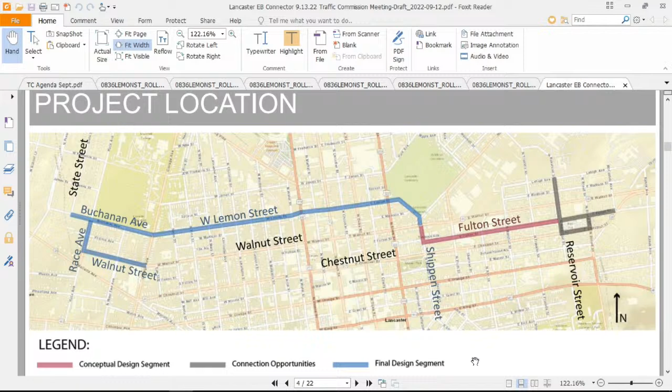So basically, the visions and goals for the project are to create an eastbound bicycle connection through the city to mirror the existing westbound facility that is on Walnut Street, creating a complete east to west circuit through the city. As part of the goals, it's to create the low-speed environment that jives well with the city's Vision Zero initiative.

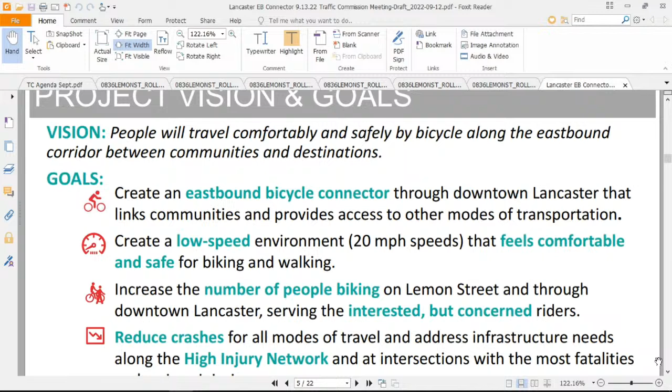to create safe operating speeds for all users within the city and to decrease high injury and deaths. Also, as part of the goal coming out of Lancaster County's active transportation plan is to increase the number of people walking and biking within the community and the county as a whole, and as I mentioned, reduce crashes.

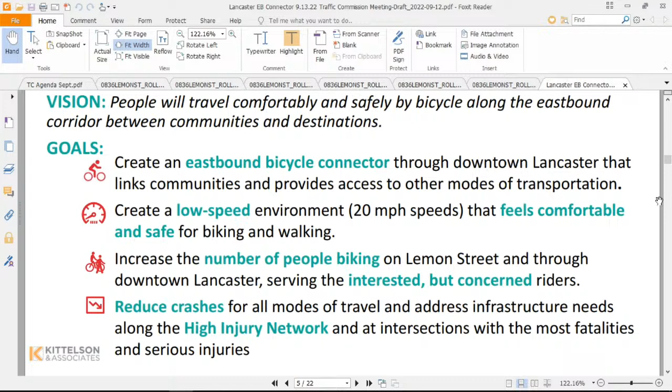We could go to the next slide, please. Touch base on it as well, but really the project stems from sections within the active transportation plan that was put together by the county and adopted by the county and the city, as well as meeting the objectives of Lancaster's Vision Zero goal. Also, with the eastbound connector also comes opportunities for future connections to the Lancaster suburbs and rural communities beyond through the planned Greater Lancaster Heritage Pathway that will connect to either end of it.

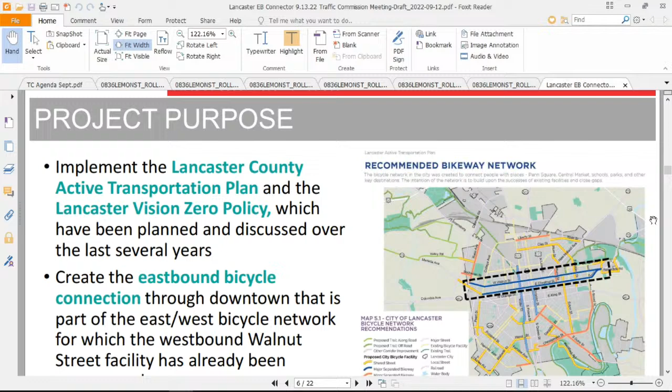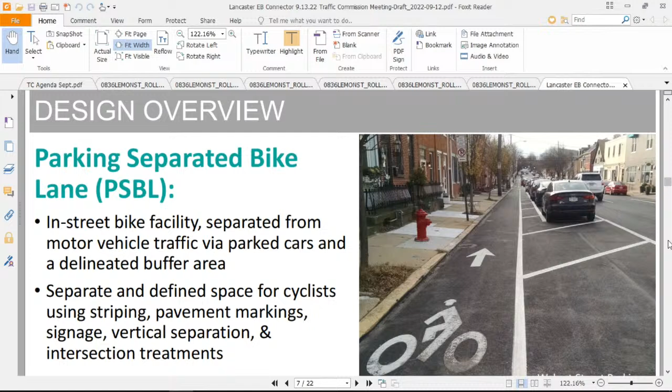Based off of data that the city collected based off of motor vehicle volumes and speeds that are on the existing corridor, the recommendation was to move ahead with a parking separated bike lane. This is a facility similar to what's on Walnut Street today. The main difference with this is, as we all know, Walnut Street is a one-way, two-lane road heading in the westbound direction, while Lemon Street is a two-way facility.

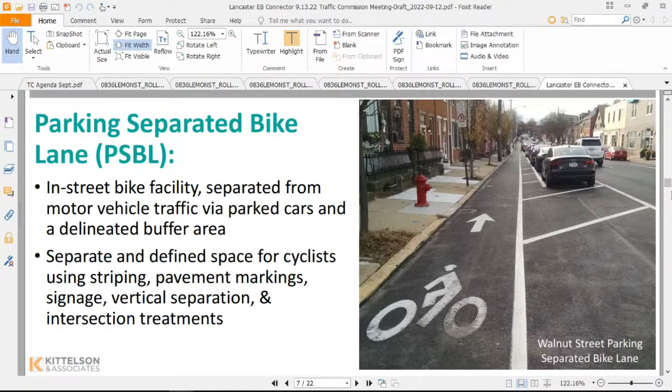So because of that, as Walnut Street is currently laid out, the parking separated bike lane is on the left side. This would be more of a traditional bike lane where the bike lane will be located to the right of motor vehicle traffic. We could go to the next slide, please.

This basically goes through some of the benefits of a parking separated bike lane. Selection of this facility type meets a lot of the goals stated within the project to increase cycling for all users and ability levels, introduces a higher level of comfort for those users, but also has been shown through studies to reduce mid-block crashes, and with correct implementation can reduce crash severity.

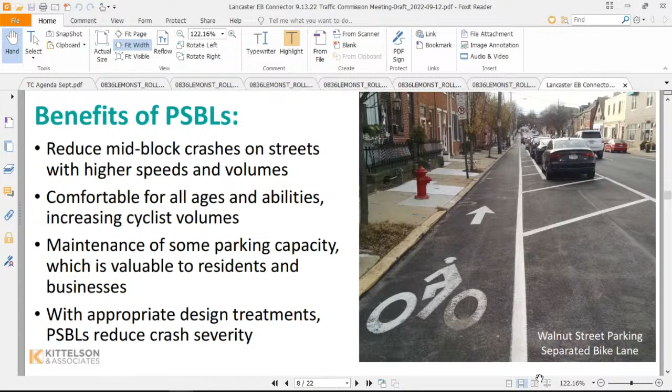Some of the best practices we'll be trying to follow with the design is to create a 2 to 3 foot buffer between the bike lane and the parking lane. This essentially reduces what's known as dooring, where a biker riding along the facility will have less chance of being hit by a person getting out of their motor vehicle by the doorway.

Also designing to a 5-foot minimum bike lane as our best practice. Similar to Walnut Street, we'll be looking to implement daylighting at the intersections. That's basically the painted area that designates the space where parking is not permitted at the location of the intersections, and provides better sight lines for motor vehicles, bicyclists, and also pedestrians at those high conflict points.

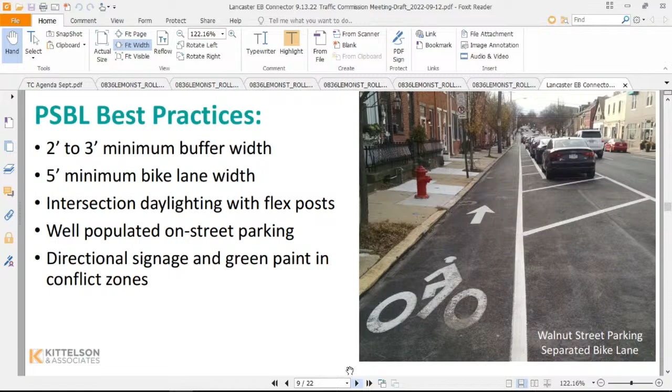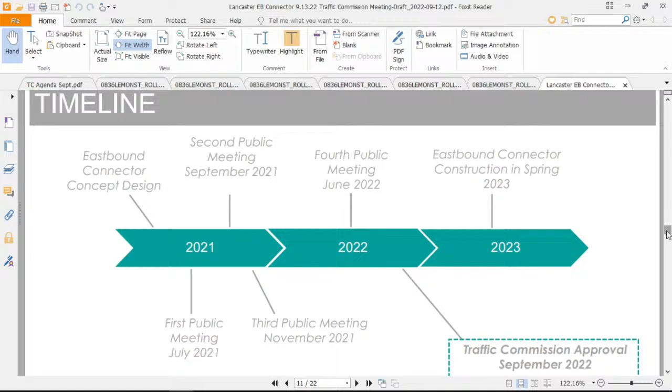Just to get into a little bit of the timeline of the project, where we've been and where we hope to go with it. We initially started concept design on the corridor in early to mid 2021, and some of the preliminary work had started even prior to that, with selection of Lemon Street as the preferred corridor for the project, and really the conceptual design as you see here today started at that point.

We had our first meeting in July of 2021, followed by 2 meetings running through 2021. We again picked up public engagement in June of this year, and that was really to focus on an extended scope area for the project in final design, initially kind of the loop on Walnut Street, Race Avenue, and Buchanan. It didn't look like we were going to be able to go into final design of it at this point, and it would be for a later time period, but there is the capacity to move ahead with that portion of the project now.

Basically our goal, our hope today, is for approval with the Traffic Commission and then move into final design through this fall and into the winter, for construction starting hopefully in the spring of 2023 into the summer of 2023.

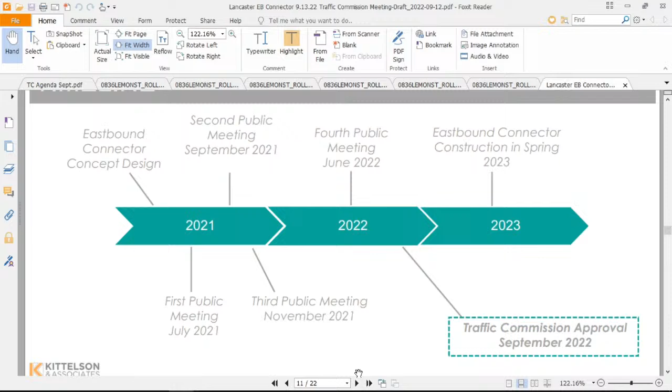This basically summarizes the goals and what was accomplished at the 4 public meetings that were held.

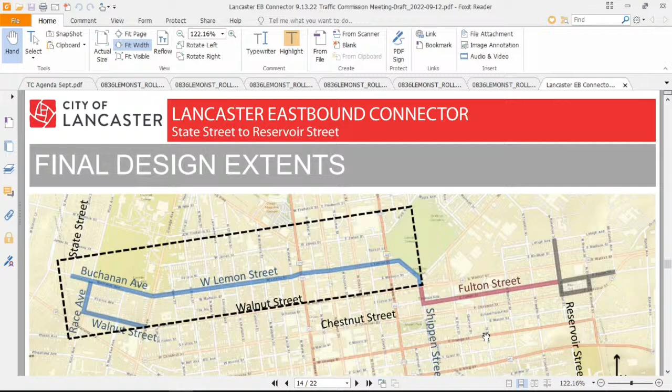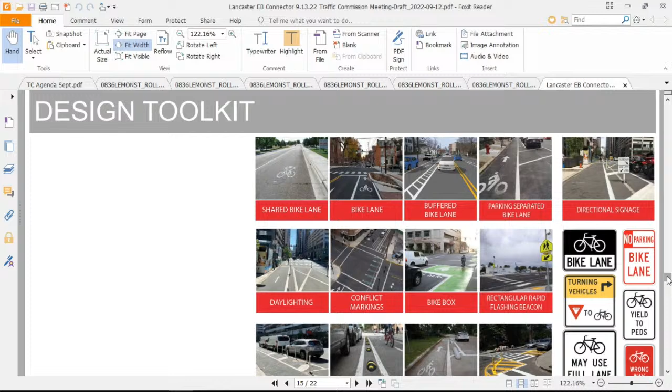Again, kind of went through this already, but showing the extents that we're hoping to take into final design. Give a little bit of an overview of the toolbox that was available and the types of treatments we're trying to implement, and also what was presented to the public at the 4 public meetings. Many of these types of facilities are already present in the city of Lancaster, and some will be forthcoming and hopefully implemented in the future.

So before we get into the plans, I just wanted to show briefly some of the typical sections and the changes we're looking to make to the corridor. This is on Buchanan Avenue along the very western limits of it. This short block here does have the highest parking loss impact along the corridor, however it's in a section that's generally low with parking utilization.

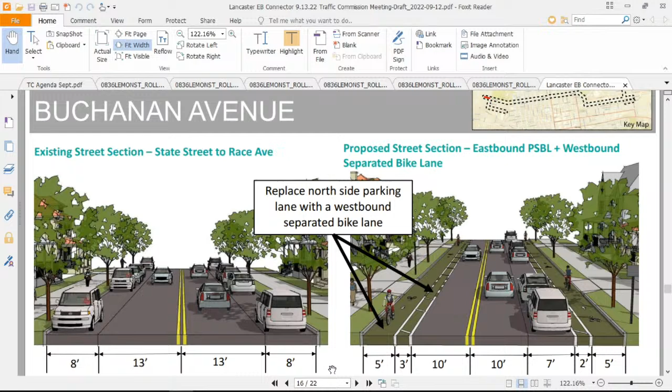This is really the only place on the corridor where we're proposing a 2-way bicycle facility, one on each side of the street. This is for basically setting up the facility for future connections to the Greater Lancaster Heritage Path that I had mentioned earlier, and basically utilizing the current westbound parking lane for an additional bike lane for this stretch on the western limit of the city.

As we go to the next slide, on Buchanan, this is where we have the existing bike lanes today that were designed several years ago. Best practices now are more towards 5-foot bike lanes than the 4 feet that are out there. Because of the additional westbound facility on Walnut Street, as we went through the public process on the project, the decision was made to eliminate the existing westbound bike lane and basically complete the circuit of parking separated bike lane with an eastbound bike lane, as you can see on the right screen.

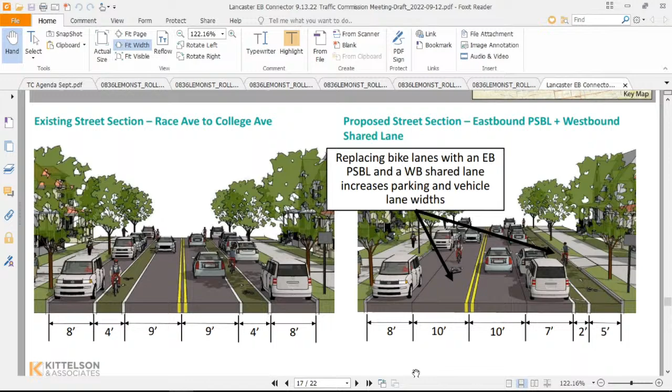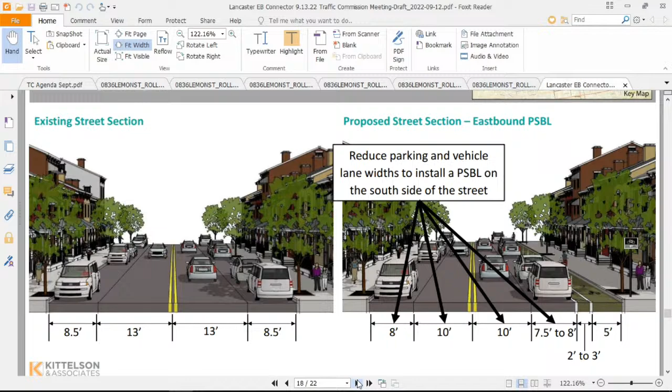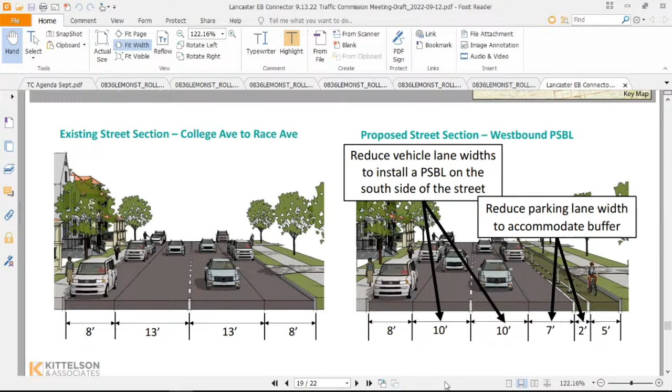On Walnut Street, we went through two alternatives during the public engagement process. One would switch the parking separated bike lane from the left side of the street, as it exists today, to the right side between College Ave and Race Avenue. The other would extend the facility on the same side of the street that it is today. We took a poll, and generally those at the meeting favored keeping it in the extended section in the same orientation as today. So we'll be extending it on the left side of the street.

The last section is on Race Avenue, the short connection between Walnut Street and Buchanan Avenue. We're looking for means to provide that connection, providing a parking separated bike lane here as well with lane reductions similar to other streets along the corridor.

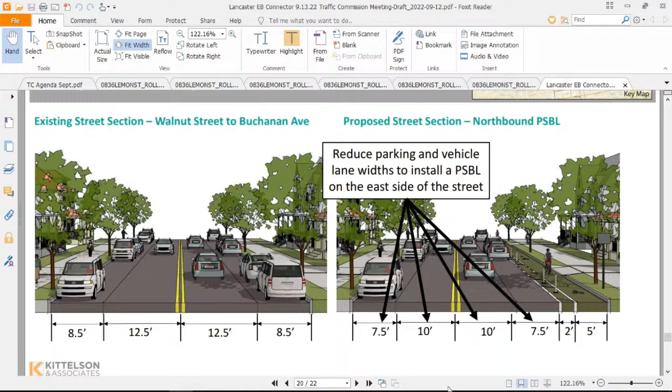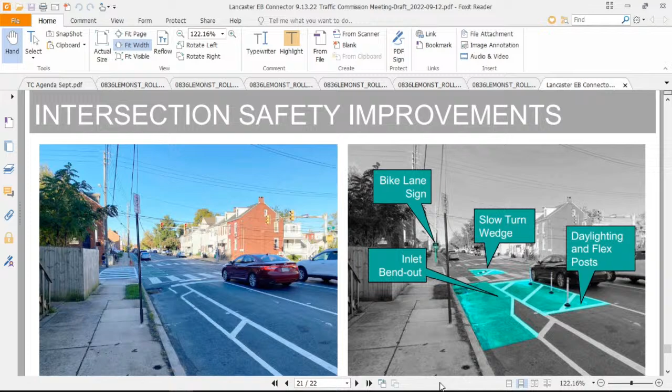Some things we're continuing to evaluate and will look at further during final design are additional treatments at the intersections themselves. This shows an example intersection along Walnut Street today and some additional improvements we could do to further enhance safety for all users at the intersections. I think with that we can flip through some of the plans for this section if there are details to go through, but in general the typical sections show the type of corridor running through the bulk of the project limits.

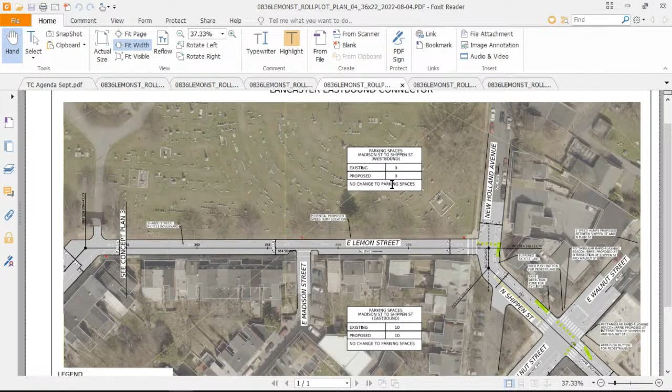And all of these were discussed and presented in detail at the different public meetings, correct? Correct.

With the public engagement process, at the first meeting we presented the concept and received a lot of feedback. At each subsequent meeting, almost question by question, comment by comment, we provided responses to try to address the concerns of everyone in attendance and those who engaged through the Engage platform. This led to several iterative changes in the design during the process, generally staying with the same basic design, but changing parking lane widths and the alignment at a couple of intersections in order to address concerns we heard.

Are there other things you'd like to present or provide to the Traffic Commission at this time? Not at this time.

Cindy, are there other things you'd like to say about the process or the input? No, I think as Will mentioned, we were very conscious about providing responses to a lot of the concerns that were raised. We did have a very robust public engagement process with 4 public meetings related to this project. So I think that people were...

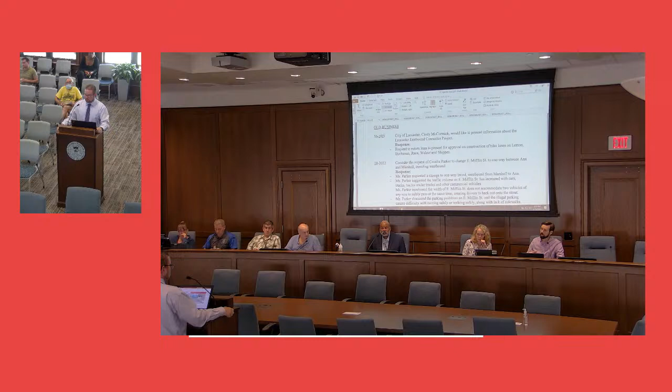Yes, I have a couple of clarifying questions. On Buchanan Ave, can you just clarify for me, is parking being eliminated on that north side for the entirety of the block? I think that would be along Buchanan Park there?

It's to the west of Buchanan Park. At Buchanan Park, the parking will be maintained.

Could we go to the actual plan views, maybe? Up at the top -- it's going to be hard for me to tell which tabs is which. That's actually the correct one. The second tab from the left? Can you scroll through to the right? I apologize. Here we go, yes, sorry.

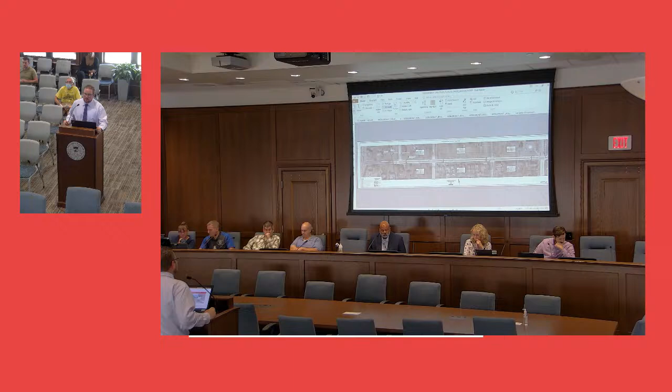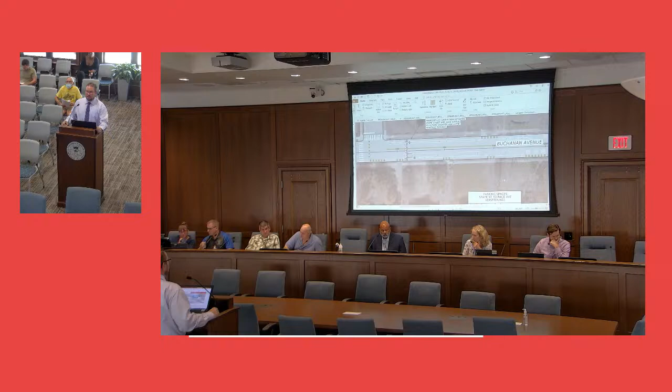Can you zoom in, kind of in the middle of the sheet? Yes, great. And scroll to the right. Almost there -- yeah, so this is basically the section that we're looking at, directly to the west of Race Avenue.

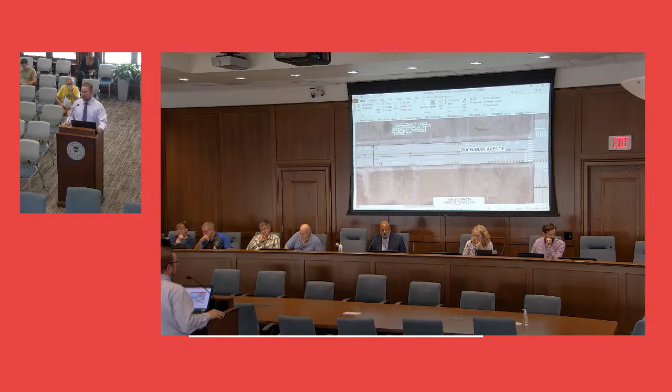The residential dwellings in this area all have off-street parking with driveways, and generally, other than for certain events, parking on this block seems to be relatively low utilized compared to elsewhere on the corridor. Once we cross over Race Avenue to the east, we are proposing to maintain parking for the remainder of the westbound side.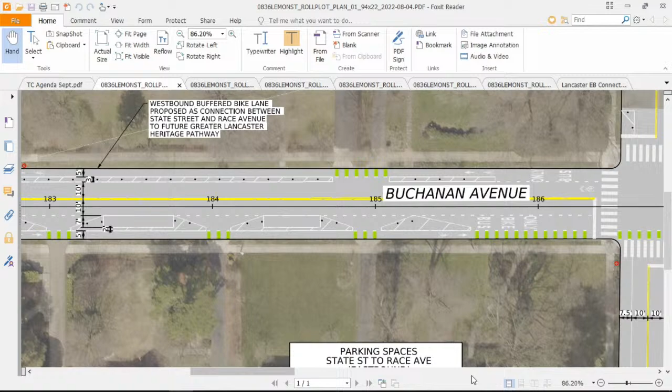Okay, do you mind if we just scroll further east to see what that arrangement is between, I guess that's Race and College? Okay, yep, and President. You want me to go any further? I see -- and this continues on the next couple of blocks, I suppose?

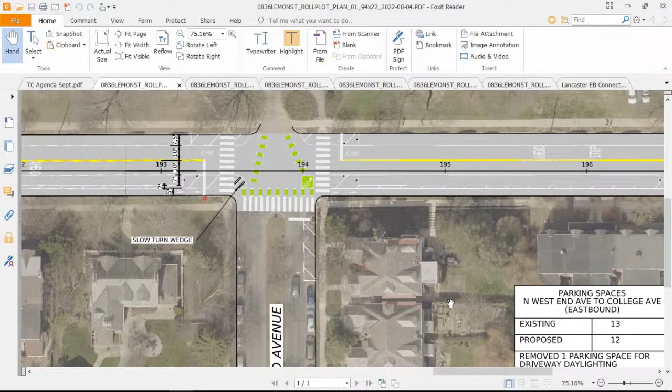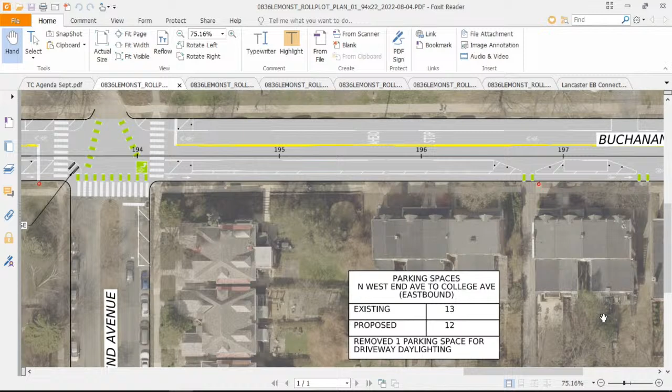Okay, yeah, and it's very similar to the configuration you would have even past College Avenue, basically trying to maintain a similar typical section. It does vary a little bit as the widths are, I think, a little bit different on Buchanan than they are on Lemon Street themselves, but less than a foot of difference. Could you go to the end of the block there, just so I can see the remainder of that? Okay, thank you.

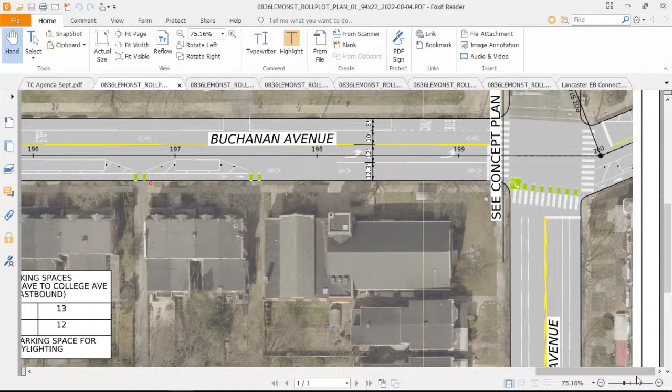One other comment. I had previously noted the connectivity between Walnut Street and Lemon Street by way of an additional connection, extending through Fulton Street to Lime. I know one of our goals here is connecting the east and west routes we're building. On the north side, I think we've done that. On the west side, I think we've done that well with the Race Ave connection. On the east side, I'm curious to hear your thinking a bit more about how those two are interacting.

I see Lime Street as a possible connection for people going west on the Fulton Street piece. They can continue to Lime Street, make a right, and hop on Walnut Street. But the alternative to that, I guess, is what I'm looking at. I'd like for you to kind of illustrate for us.

I'll start by saying that's still very conceptual in terms of how the alignment will ultimately go. For what we're looking to take to final design right now, it's a determination of both the east and west facility. It'll create a connection to complete the circuit at the intersection of Walnut and Shippen. But we've been working to identify several alternatives at the very eastern end of Fulton. It does depend on some opportunities becoming available in the future as far as access would go. Unfortunately, without a map, it's hard for me to talk through the various alternatives, but we've been going through conceptual alignments for them, and as that portion of the project moves ahead, I'm sure it'll be run through the public engagement process.

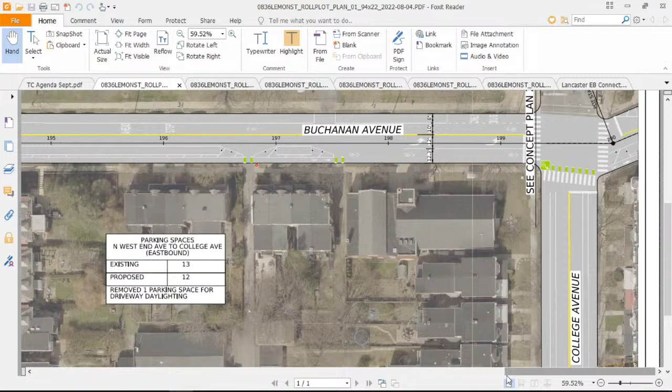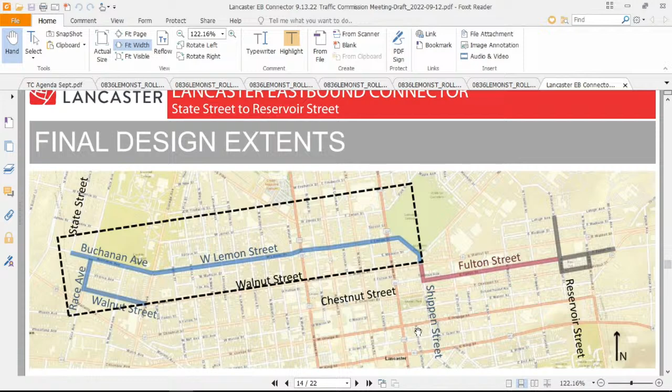Which slide is that, so that it might be visible to everyone? It's page 14, Rhonda. Slide 14. Yeah, I was using the wrong mouse. So if you scroll down a little bit, Fulton Street is two-way for all traffic.

It sounds like we currently are proposing a shared lane going east on Fulton Street, but not going west. Correct, and I understand the Walnut Street lane is one option. As an addition, potentially you could have a shared facility going west on Fulton Street and extend it an additional block to Lime, where people could make a right going with traffic, and then a left on Walnut. Whereas right now, if they can't legally make the right on Shippen to connect to the Walnut Street lane, they would have to do that a block earlier on Plum. So anyway, just a point of consideration.

My last question is just around the connection on Race Ave. I was sort of intrigued by the need to create the loop. I think of these bike lanes really as corridors where people are hopping off at one of the exits, so to speak, along the way, and I was curious about the importance of creating the Race Ave corridor connection there, and whether there were plans to extend that further south or north from there, and what you see as the benefit of adding some expensive infrastructure on just that short of a block.

I'll let Cindy talk about future opportunities to extend the corridor, but the thought process behind creating a circuit is basically for this bicycle facility being the arterial, so to speak, for bikes through the city. If someone in a neighborhood in the western part of the city wants to head to the east side, they would have the ability to use Walnut Street to head west and then north for a block before heading east, providing that facility that's safe and comfortable for all ages and abilities, and creating that connection that may not exist otherwise.

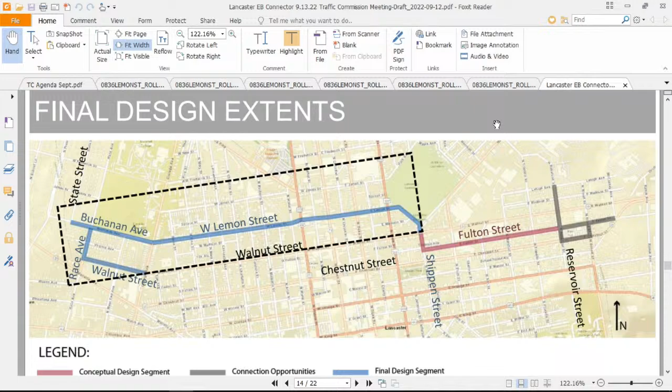Are there other comments or questions from the commission? Are there comments and questions from the public? Please, and if you would, give your name and the block and number you live on.

Some of you know me. My name is Bill Hoffman. I actually live in Manheim Township. I can give you the address there, but maybe that doesn't matter. I'm a member of ATAC, the Active Transportation Advisory Committee. I'm also on the State Bicycle Pedestrian Committee. Anyway, I am probably going to disagree with almost everything my friend Will has said today.

I just came from a meeting of PPAC, the quarterly meeting, and there was a question of what is going to happen with House Bill 140. That's the legislation that would enable these parking protected bike lanes, I call them hidden, but let's go with parking protected for now, to be built. In Philadelphia, they're doing a pilot program on some streets. Philadelphia is a different animal from the rest of the state, but currently that design is not legal. What you've been looking at here is not legal in Pennsylvania.

I remember a meeting of this body, it had to be 5 years ago because Rick Gray was still mayor, when the Chestnut Street bike lane was being discussed, a similar type of facility that we now have on Walnut. The former mayor, Art Morris, got up and pointed out that the vehicle code says, cited book, chapter, and verse, all vehicles must be parked with the wheels, whichever side of the street they're on, within 1 foot of the curb. So right now, until that law is changed, that's not legal.

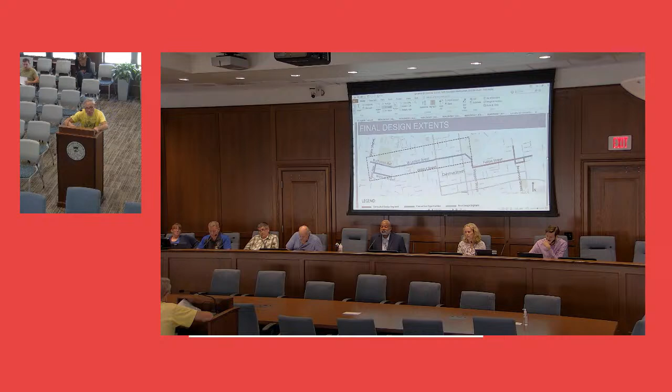Okay, I think that's all I have to say. Thank you. Thank you very much.

Would you like to say anything to respond to a couple of the points that were made? Related to Buchanan Avenue, they aren't being replaced as they currently exist, so they would be replaced with this new section, with the parking protected bike lane. And at the width that is legal. That's just for a very small section, the parking removed is only basically for half a block between Race and State Street, where there currently isn't any bike lane.

Thank you. Thank you very much for that. I do want to reinforce also that the infrastructure that's proposed is trying to, as you had noted, implement the countywide active transportation plan. The principles thereof were adopted by not only the county, but also by the city.

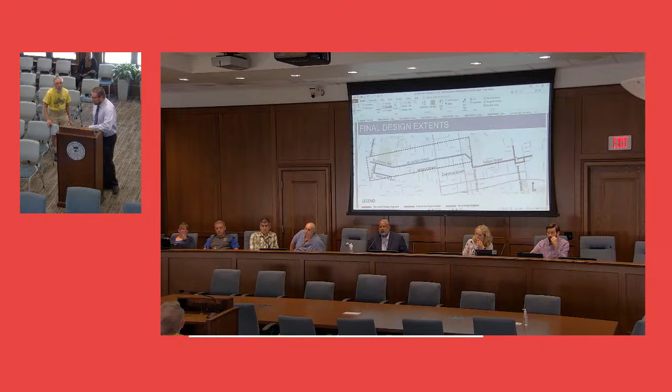Are you able to speak to that at all, Will? As Bill is aware, the current highway design manual from PennDOT does not include it. There are modifications that are forthcoming, but they have not been published yet at this point.

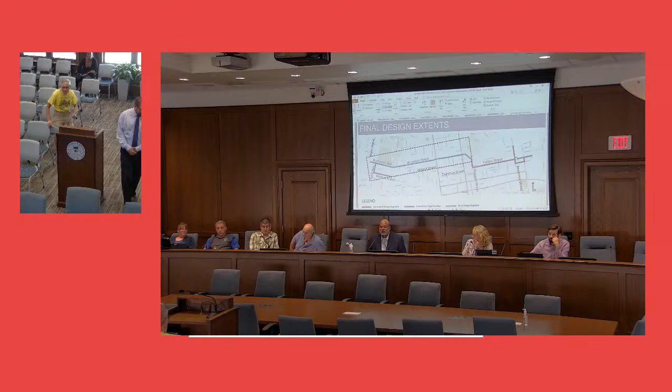Good afternoon, thank you. Bill Hannigan, 304 College Avenue. So my property fronts on College, but the whole side is adjacent to Walnut Street. And I'm aware that there is a lane for bicycles coming out Walnut Street. This gentleman might have referred to it as the left side of the street. I would say it's the south side of the street, to be clear.

And I came in the middle of this and not understanding whether the existing corridor for bikes as is on Walnut will continue, or if there's some change taking it to the north side or right side. And then I totally don't understand which side of the block the bike lanes will be on in the 8 and 900 block of West Walnut Street.

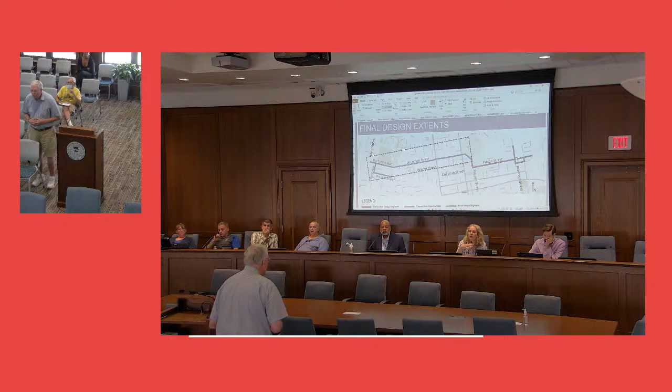Will, are you able to speak to that? I can. They're gonna continue on the south side of the street, the bike lane will continue on the south side of the street. Okay, that's a big question in my mind. So, thank you. Are there other questions or comments from the public?

Good afternoon. My name is Tiana Johnson. My main concern, which brings me down here, is the intersection on Charles Road and Wabank. My son goes to school at Hamilton.

And every morning, he's tapped into his independence, and right now he wants to walk to school by himself. He wants to come home by himself. And we live right there, so if I come out to the driveway, I can literally see every kid come off of Hamilton's little roundabout before they get to the actual intersection.

Now, it's not the crossing guard at all, it's the vest that people don't respect. And it's not your 16-year-old people that just got their license. These are adults that I don't know if they're not leaving their house on time, that's beyond me. But when I see my child, this is what brings me here, because one day the car didn't even wait till my son got onto the sidewalk. They're already accelerating to go to where they have to go.

And I get it, but as a parent, as a walker parent, I want my child to get to school safely just like any other child, whether they're on the bus, whether their parent takes them, however the case. And I see this for myself, speeding, they're just beeping the horn just to get past.

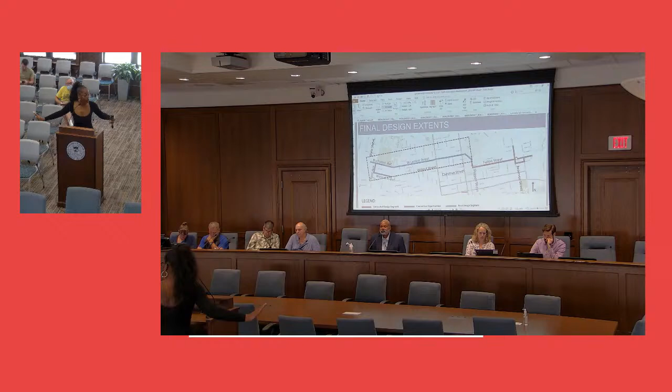Once the crossing guard is this way, she's stopping the cars this way, everybody's supposed to stop until she has her arms up. She can see the cars disrespecting her because they still going, but she is telling everybody to stop, telling kids and grown-ups to get to the school. But there's cars doing their own thing, almost hitting kids, almost hitting adults.

So this is what brought me down here, because I don't know if it's like a speed bump issue. I don't know if it's a light that could be put there. A stop sign's not doing it. I don't know if a cop can be there.

When I spoke to Miss Bernice, which is the actual, she's an aide in there, I don't know what type, but she's at the front desk at Hamilton herself. When I spoke to her, she said, Miss Tiana, I'm gonna make sure that I do something about this. For 2 days, we had a cop sit down on the corner. It's not that corner that they need to sit on, Charles Road.

If they're going to sit, they need to sit right there on Wabank so they're seen. Because I don't know if the lights need to be on or something, because there's no respect for the children to get to school safely. I don't feel safe for my son, and I see it for myself.

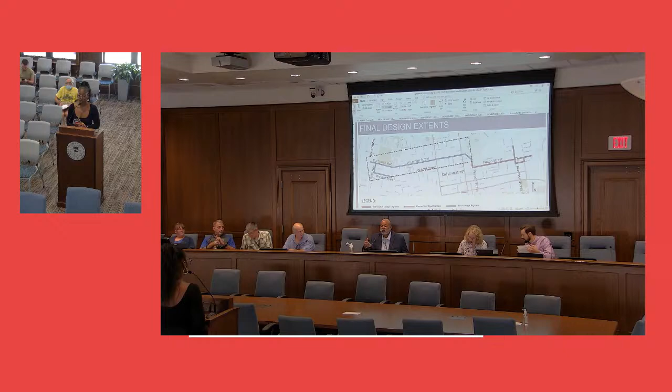So if I may say, you may want to raise this again at a slightly later point in the meeting. Because I came late, I probably missed it, sir. No, not a problem. This is primarily related to the eastbound and westbound connector. I am so sorry, they just told me to come down here September 13th at 3:30, and I said I will not miss it because this is something that's really on my heart. Very good. So I believe ordinarily there's an application process if you want to raise an issue that needs to be addressed, but we can listen to it at a later point in the meeting, if you don't mind. That's not a problem. Okay, thank you. We're just beginning the meeting, so you didn't miss anything. Right, thank you.

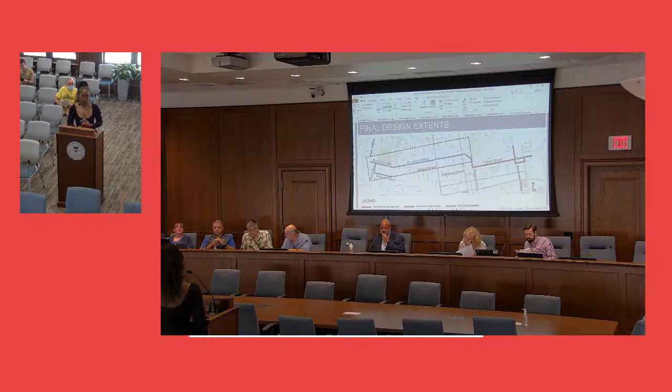Are there other comments or questions from the public? Will? Yes, please.

In response to what Bill stated, the current PennDOT guidance does not provide it, but I do want to say that the design we're basing the design for both the existing Walnut Street facility and the proposed eastbound facility on is based off of federal highway guidance and standards that comes out of Washington, D.C. So while state guidance does not currently have it, there is federal guidance for the design and implementation of parking separated bike lanes. Are these considered best management practices or commonly accepted practices at the national level, with exceptions at the state level? They are continuing to evolve and become more widespread and adopted throughout the state and region as well. And yes, we're following the best practices implemented through the FHWA guide.

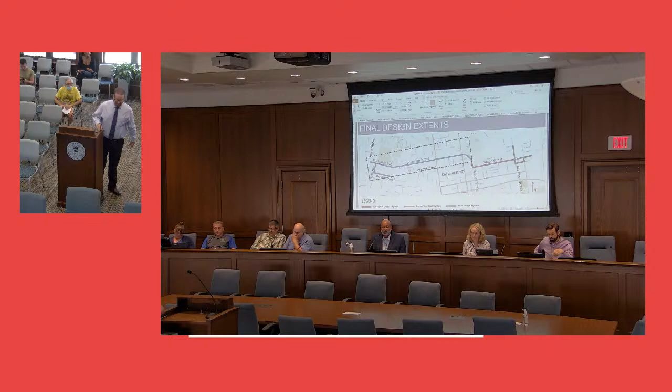Thank you very much. Are there other comments or questions from the public? Is there more discussion here at the council level, at the commission level? Mr. Campbell, I just want to clarify, we're looking for a recommendation for approval of this concept, right?

Which I'm certainly in support of. I think my one request is that we continue to look at the connection between the eastbound and westbound. The more I look at this, I'm realizing there are many points of connection between the two, potentially. It doesn't just have to happen on the east side of the city, though I do think the Fulton Street or Plum Street would be helpful. We've been successful doing that on the west side of the city. I would just encourage us to continue to think about what those connections are on the east side of the city between the two facilities. So with that, I would like to make a motion unless there's more discussion.

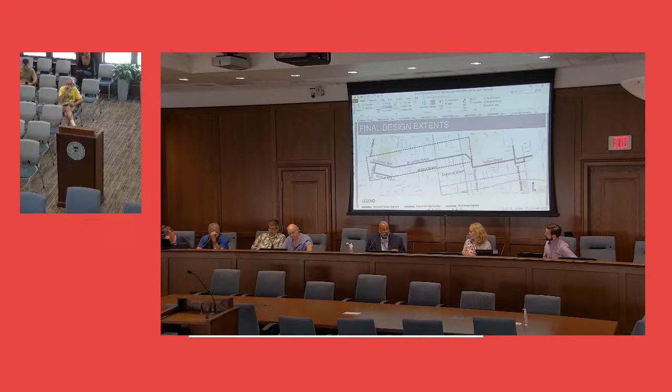I just wanted to make a clarification that the part we're looking for approval for, or that is being looked for approval for, is the part within the black dotted line. Understood. The part outside of that, which I think is most of what you're referring to, are items still under discussion. Sure, and I think my comments could be addressed in the next recommendation potentially, so I'm all right with that.

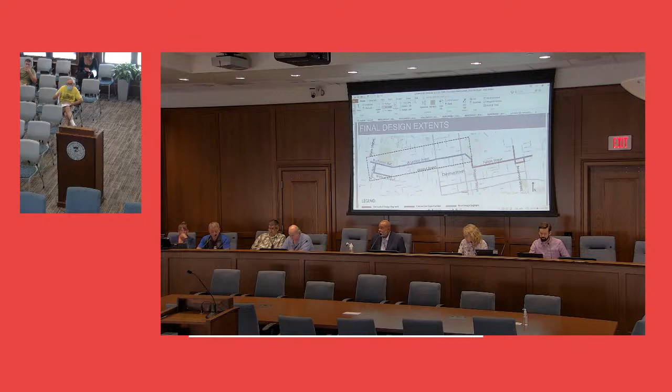So I'll make a motion to approve the eastbound connector design as presented to the Traffic Commission. A second? There's a motion and a second. Is there further discussion? If there's not further discussion, all in favor, say aye. Aye. All opposed? Opposed.

Did you want to describe a little bit further about your opposition? I know you had made comment as well, Sergeant. I still have his concerns too with enforcement, et cetera, that we need to update the ordinances about that if we're going to have them do enforcement. And that's coupled with other things, but the important one is about the parking, because it is curbside.

So we have 2 opposed, 4. Is that correct, Rhonda? Yes, that's what I have right now. If you and Cindy are both saying you agree with that, I have Douglas Smith and Dean March as opposed. Okay.

So the nature of this is a situation I haven't been in front of yet. The majority is saying they approve it, and it's documented on record that there's opposition to it, along with the reasons for their opposition, which may actually be addressed in some way as we move forward, because this is the approval of the design, not yet the implementation.

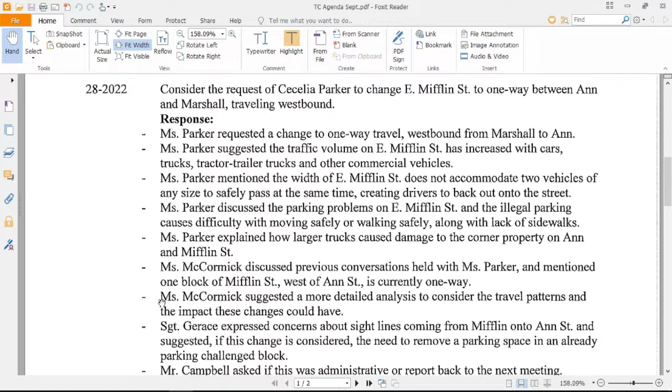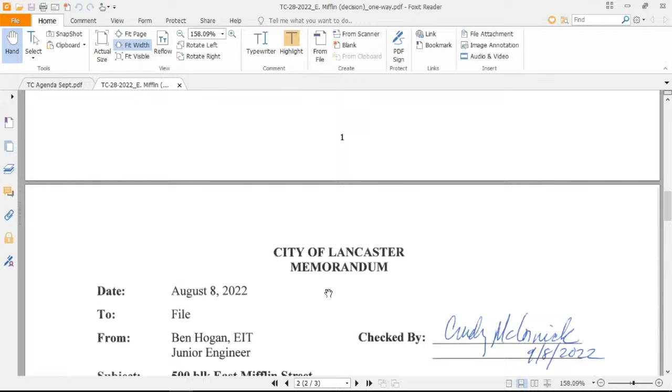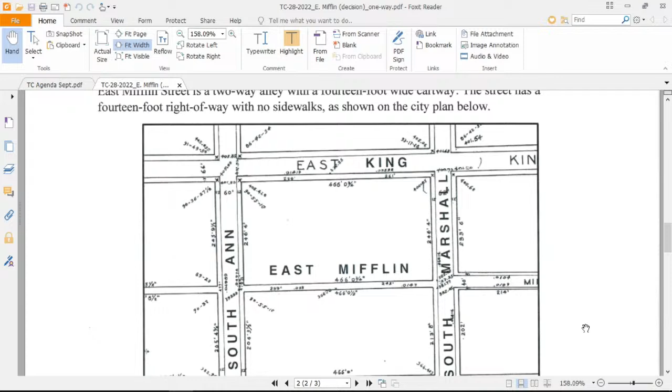Yes, we conducted a traffic study on the section of Mifflin Street between Ann and Marshall, because the request was to make it basically one-way westbound. So we collected volume and speed. It's a pretty even distribution of traffic: 46% was traveling eastbound and 54% westbound. At the highest hours, there were about 12 vehicles per hour. There are trucks that use this street because of the facilities located along it.

But given that the traffic was pretty evenly distributed, and there are opportunities for vehicles to pull off to the side, we were not recommending converting this to one-way. We also reviewed crashes. There was one crash at Mifflin and Marshall, but no crashes at Mifflin and Ann.

Are there any comments or questions about the results of the study? The request was to be able to do the study, and that has been performed, with recommendations to not make any changes.

I would also note that one of the concerns was vehicles hitting the applicant's porch, so we worked with her to allow her to install some bollards adjacent to the house, to try to keep vehicles away from the very edge of the house as well.

Is that the corner property there at Ann Street? Yes, it's on the south side, of Mifflin. Going westbound, Ann Street is not a wide street where you can move trucks or tractor trailers without taking up both lanes when they're making a turn. Yeah, that was another thing.

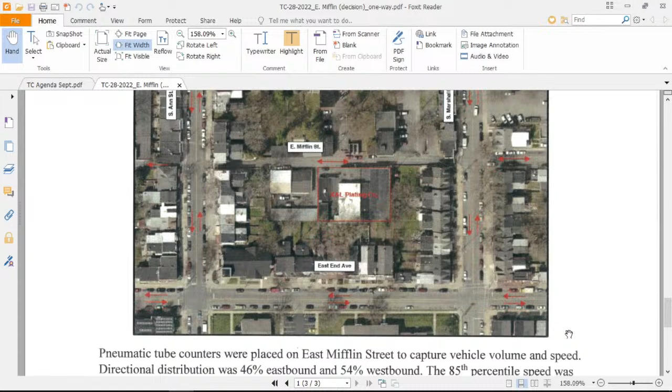Thank you very much. The next item is, we now go over to the action agenda, where the first item, 35-2022, is to consider the request of Jen Godfrey to review the intersection of Hamilton and Marshall Streets for safety and maybe consider a four-way stop.

Is Ms. Godfrey here? He is concerned with the speeding and accidents in the area that is not safe for the neighborhood, and also suggested tree removal. Cindy, is there a summary? I haven't looked at this. This is a new request, so I'm not sure.

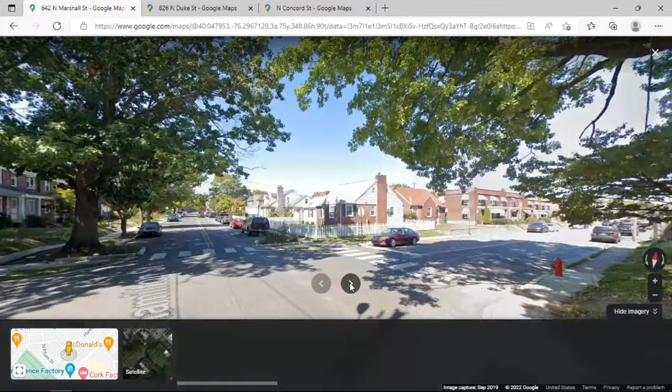So this is the intersection in question? Hamilton and Marshall. It is difficult when something is fully marked. There are stop signs in two directions, but not all — it's not a four-way stop at present.

Rhonda, has there been any further comment or outreach from Ms. Godfrey? Just the letter that came through. It actually went through city, it didn't come to me directly. I sent notice to Ms. Godfrey that this was coming to traffic commission, and I don't believe anything was returned to confirm.

Okay, do we wish to table it? I think, Stephen, we could probably close that item out. I can have some of our people talk to her and look at that intersection. I don't know if there's anything that the traffic commission necessarily would change, but we can go out and take care of that action item.

That sounds very good. Everything sounds administrative, with the exception of one thing about suggesting the tree removal. In all my years on traffic commission, I don't think we've ever actually made any kind of recommendation to have landscaping or a tree taken down. I know from time to time we get really big trees that do conflict, but we typically make changes like restricting parking up against the tree to help the sight lines. I don't think we've ever done anything with removing a tree.

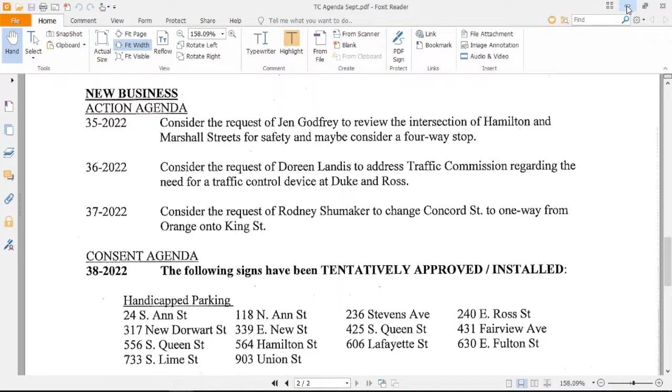She'd like to discuss issues related to speed and safety on North Duke Street. So if you'd give us your name and the 100 block in which you live. Yes, I'm Doreen Landis, and I live in the 800 block of North Duke Street between Clay and Ross. I'm sorry, could you just speak up a little? Yes, sorry, I'm Doreen Landis, and I live on the 800 block of Duke Street between Clay and Ross Streets. And the reason that I'm here is because there have been many accidents at the intersection of North Duke and Ross Streets.

On June 30th, there were actually two car crashes where two cars hit each other in that intersection. And as far as I know, there were many accidents before that I've witnessed and what I've been told as well. Cars really speed down Duke Street, and if people pull out, it's almost like they're taking their life into their own hands because they have to pull out, and if a car is actually parked close to that curb illegally on Duke Street, then it's even harder to see. So if cars would be going the legal speed limit, they would have a little more time to stop.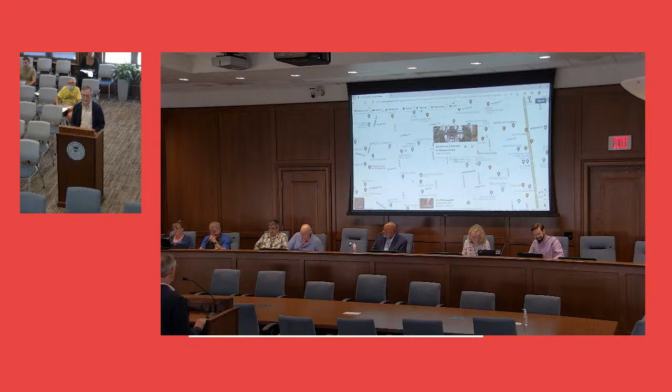Otherwise, all in favor? Aye. Any opposed? Thank you very much, Rhonda, for keeping us in order.

Mr. Shoemaker? Good afternoon - Rodney Shoemaker could not be here this afternoon. My name is Dave Blitz. I'm here representing the Facilities Committee of Community Mennonite Church of Lancaster. We're located on the southwest corner of Orange and Concord.

This issue first came up when one of our neighbors, Kent Mast, approached us about putting a mirror at this intersection because he was concerned that people come around from Orange Street too quickly into Concord, which is a very narrow alley. If you enter that alley too quickly and someone is coming north on Concord Street, the person coming in from Orange has to back out into the traffic of Orange Street. That's particularly unsafe for delivery vehicles, service vehicles, and the Red Rose Transit handicap access buses which use that street.

We took our concerns directly to the city engineer - I'm sorry, we didn't realize we should have come here first. The city engineers reviewed our request to improve the safety at this intersection, and they have made their recommendation. We realize it is inconvenient for people who want to come out directly to Orange from Concord, but that is an inconvenience we are also willing to accept to improve the safety of this intersection. Thank you to the city engineers for the time and resources they put into studying this safety issue.

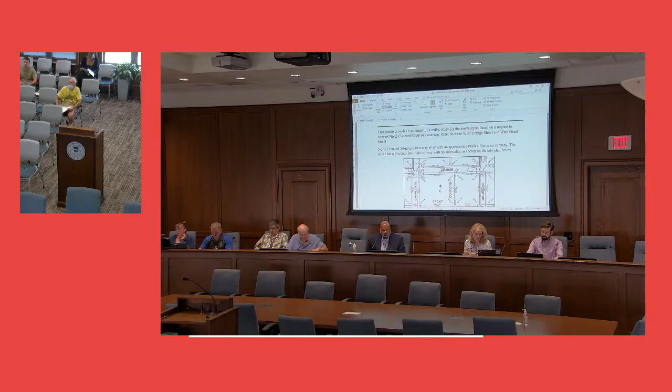Based on this request, rather than bringing it to the commission first, we thought we'd do the study so it wouldn't have to be presented twice. Similar to what we did on Mifflin Street, we looked at the traffic volumes. This one had more people traveling southbound, about 62%, with 38% traveling northbound.

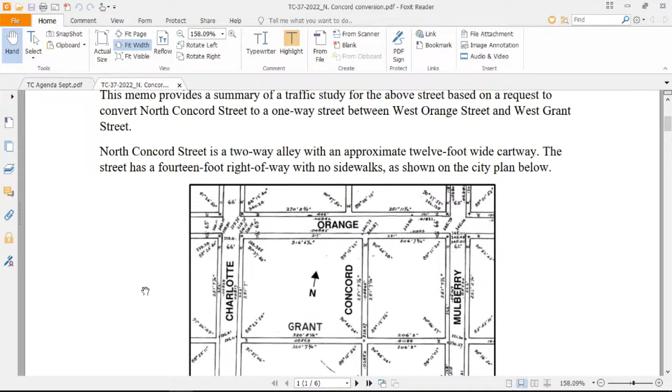The vehicles ranged anywhere from 10 to 18 vehicles per hour, depending on the peak hour. We also looked at sight distance.

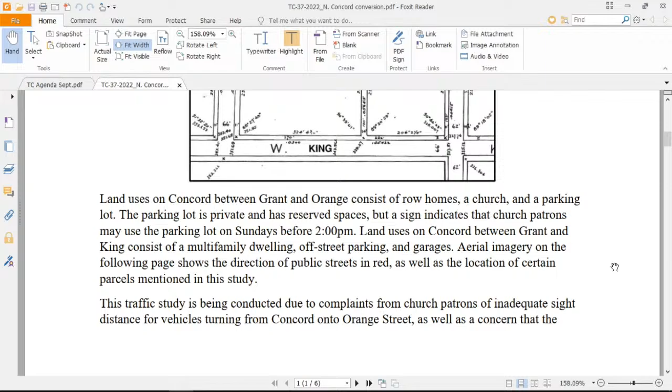At Orange Street, we noted there probably could be improvements as far as parking removal. We also noted that given the block, there really weren't many opportunities for vehicles to pull over to let other vehicles pass, similar to what happens in a lot of our alleys or lower width streets, where there are generally opportunities for people to pull over.

With the church on the west side, it curves pretty much the length of the block, and then there's fencing and other things on the right side that prohibit people from being able to pull over.

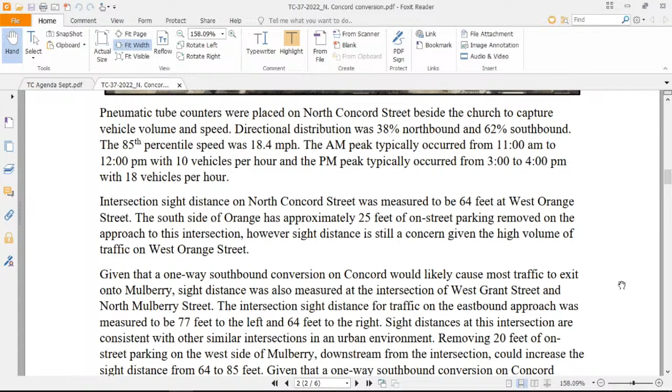So we were recommending making the street one-way southbound, all the way from King Street to Orange Street. We're assuming a lot of traffic would use Grant to come out to Mulberry Street. There was a recommendation to remove a parking space on Mulberry Street to allow for better sight distance exiting that way.

In doing this process, we consulted with police and fire about making this recommendation, and then we finalized this. We also reached out to the people that lived in the area and hung door flyers to encourage them to attend the meeting to express whether or not they were in support of converting it to one-way.

I believe we had forwarded this to Rhonda. There were 3 people unable to attend the meeting who sent their opinion. We had 2 that indicated they thought it was fine the way it is. I believe those were people that lived on Grant Street.

This would limit their ability to access Orange Street as quickly. Given that Grant is one-way eastbound, if they wanted to go north they would have to go out to Mulberry to get north or west, I guess, is the issue. And then there was one that was in support, I believe.

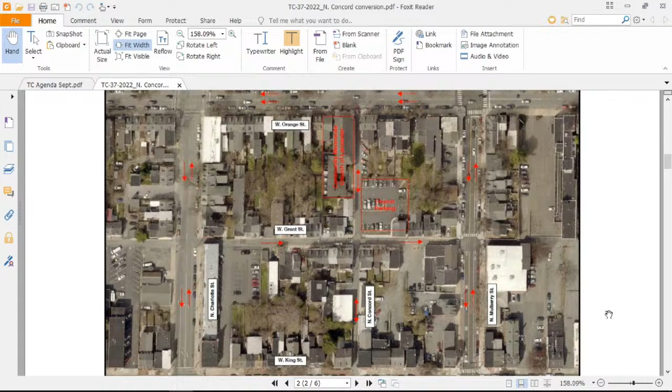Is anyone from the public wanting to speak on this item? Please.

Do those get submitted somehow? You can actually put them on the table, you'd have to switch them around, but there's not going to be a microphone over here. That's fine. But there is a camera that can—just lay it down. If you turn them 90 degrees, yes.

It was clearer when you— yeah, it's autofocus. Okay, placing. Don't touch.

So I live on the corner of Concord and King Street. Our house is a historic house in Lancaster. We have documents from the National Park Service and Registry of Historic Homes showing the land it was built on was established as a parcel in 1740, and that the house was likely built between 1780 and 1790. The original parcel of land was 220 acres, so it's very likely it was built prior to a lot of these streets being established.

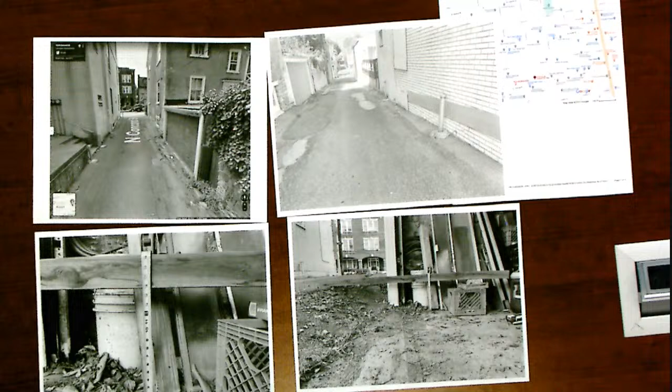Concord is also a really narrow street, which does create occasional problems as far as vehicles traveling both directions. But in general it's a very slow rate of speed, as referenced in the traffic study—like 18 miles an hour on average—so those occasional conflicts can usually be resolved. There wasn't any reference to accidents actually created by vehicles traveling opposite ways on this street, and I think that's important to note.

The traffic study also doesn't really comment on the exit that would be created by this onto King Street, where there's essentially parking right up to Concord on both sides with no line of sight. They comment on Mulberry, and even the church's concern was more so about pulling out onto Concord.

But the long story short is that if this is implemented, it basically limits our ability to park in our garage, because if we travel in the proposed direction, due to the narrowness of the street, we have to use the full width of the garage. Even though it's a double garage, we have to pull forward and kind of turn in, and we'd essentially be driving over this 15-inch drop-off instead of being able to come from King Street, where we can pull forward and drive over the lower portion.

So it would basically limit our ability significantly to utilize our off-street parking, which we'd love to continue to do and have precedent for doing.